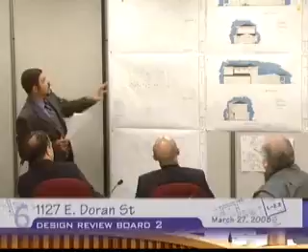The first front unit was built in 1923 with no garage, and the second unit in the back, which is smaller, was built in 1940 with a 1-car garage. They're not proposing to add any floor area to the second unit in the back, so they will not be asked to provide a second car garage for that. But they are being asked to add a 2-car garage for the front unit if they're going to add any floor area, and they are proposing a 2-car garage.

The existing house has a pitched roof. The main entry is accessed through the front porch. There are tapered columns supporting the front porch roof. The addition will have a pitched and hip roof with the same slope to match the existing, with exposed rafters. The rear unit will maintain its existing pedestrian and vehicular access. The applicant is also proposing that the common outdoor space for both units be located at the rear of the lot, over here.

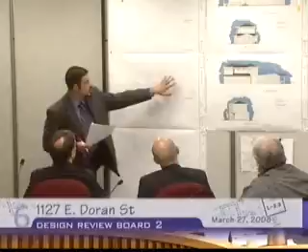Because this submittal is a preliminary submittal, we did not require them to have a landscape plan. However, I will get through the recommendation portion, and we do recommend that they add more plants and trees in the back of the property.

The proposed addition is located toward the rear of the existing front unit, and it is a 2-story addition. The existing 1-story house at the front will remain at its current configuration, and its appearance will be maintained from the street. The neighborhood is comprised of a variety of 1- and 2-story houses. In fact, the property right next door is 2.5-story, meaning a 2-story house, 2-story apartment building over a semi-subterranean garage. The project's massing is focused towards the middle of the lot, not the rear, but rear of the front house and middle of the lot, so it's not really having any major impact on the street level, I should say.

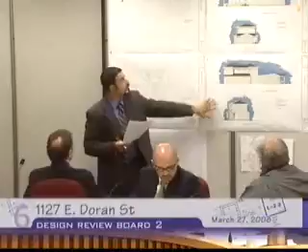The materials that are proposed to be used are clear double-insulated glass windows set in fiberglass. There will be wood sidings throughout. By the way, the elevation drawings that we have here are not up to date. They are proposing wood sidings throughout, and there will be no glass blocks—these have been taken out. You can see it on your handouts, but they're not here. Just to clarify that. And the roof will be asphalt shingle.

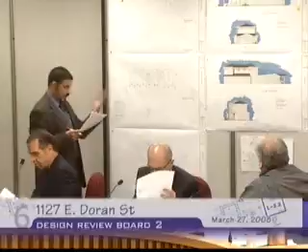Staff recommends approval to move to the final, based on the recommendations in the comments we have already made. The applicant has been able to create a proposal that fits well within the neighborhood and the site. The massing of the proposed project is focused towards the rear of the house and middle of the lot, which reduces its impact on the street level, and the overall appearance of the addition complements the front unit, the first one-story house, and fits well within the neighborhood as far as its massing goes. I am available for questions.

I do have some questions, but I will wait until the...

Okay, this is what I understand, and I went by but didn't walk into the property.

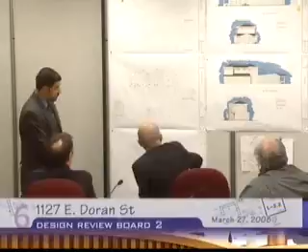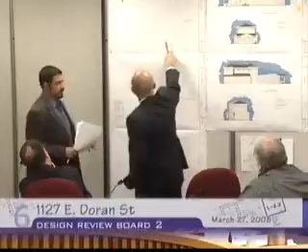What I understand is there's an existing one-story structure, and this other unit, considered the duplex, will be the front unit. This is the existing one-car garage, built for both units. But this other unit doesn't have a garage and never had one.

So now what we're going to do is maintain this, move it back, and have the two-car garage for the front unit. What we're looking at right now is just this - we have nothing on the back unit, as far as elevation drawings go.

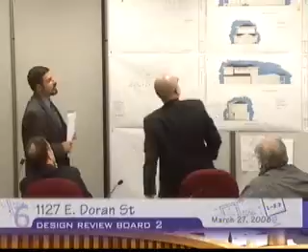They probably should be drawn to the back. I'm glad it's preliminary, so we can give them some direction of where to go with this.

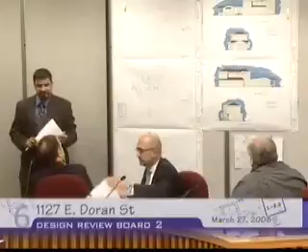Applicant is also in the audience if you have any questions. Any more questions? We good, aside from the applicant? Okay, I only have one card, which is the architect, Johannes Masei.

My name is Johannes Masei, and I'm the architect of this project. I'd like to thank the board members, chairperson, and Gevorg for the opportunity to speak. I think everything has been covered by Gevorg. We'd like to propose the two-story addition, with the style echoing the existing semi-craftsman or bungalow style of the front unit house, with wood siding, gable and hip roof on the new units, and exposed roof rafters that will complement the neighborhood.

I'd also like to add that on the east of the property we have three-story apartment buildings, and on the west a two-story similar building as we're proposing. Across the street there's a mix of one- and two-story buildings. Thank you, and I'm more than happy to incorporate input and feedback into our design, since this is just a preliminary design.

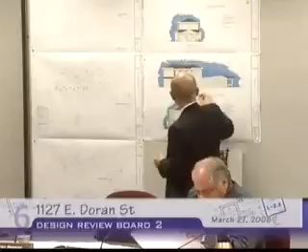First of all, I'd probably revisit the window selection, and rather than using vinyl, I'd go with something higher end. And if you are going to... It is fiberglass, I'm sorry for interrupting. If it is, that's what I was going to say - then I'd probably create a lot more substantial frame around it to create a better effect and more depth of the windows. But I'd re-look at these details of very contemporary features versus the old.

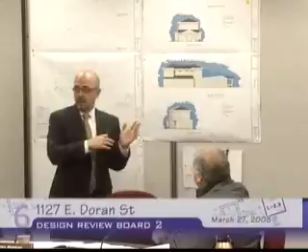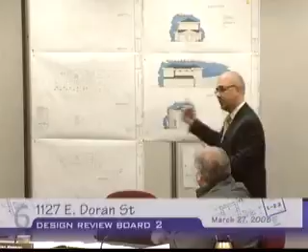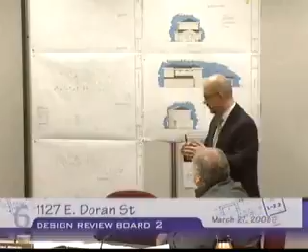You mentioned craftsman bungalow, and if you've seen me speak in past years, if you mention a style of architecture, I'm going to use that as my guideline and design your plans based on the architecture it's asking for. So looking at this as craftsman style, it's nowhere near there. If it's bungalow style, it's nowhere near there either. I'm just commenting, and you can absorb it, hopefully it'll help. If you're going toward those styles, I'd revisit this entire design and study the bungalow or craftsman style and see what makes a craftsman a craftsman - handcrafted elements of post and beam and woods, the rafters versus the posts and different things that come together, crafted. There's nothing here that shows us that.

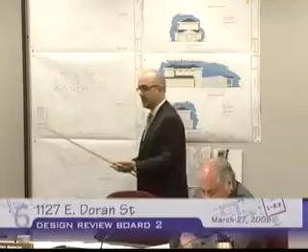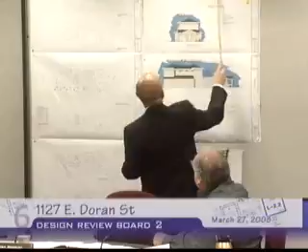So I'd highly recommend visiting this. But going back to my comment - these are just ideas - right now you're showing a storage area of about 62 square feet, and I'm not sure what that's all about. Another thought is that if you find another place for this, maybe an element here, an element there, and create a balcony over this, it can get carved out with a trellis element or something that works with the craftsman style. A balcony may appear here to create some transition points. The roof lines may play the same playful effects as the front - look at the design that way and take it to the next level.

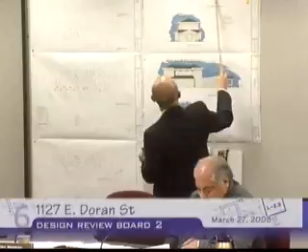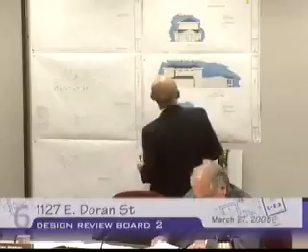To me it's a wasted opportunity, and it's not a craftsman nor a bungalow. If it comes back like this, I'd encourage my colleagues not to accept it. Look at the quality of the detailing - this isn't going to work. You're going to have a header there, with the post and beam - use that. It's an opportunity to detail that properly, create an overhang, maybe some exposed rafters like you mentioned, or a header and something there. Don't use Home Depot material for this - these garage doors - go a step beyond and use better quality doors and garage doors.

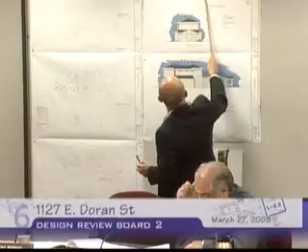And right now you're saying the entire facade is going to be covered with siding. Again, it's a good gesture, but use the opportunity to bring in different materials. Maybe the siding can occur here, and then in some areas you want to keep it as plaster. I don't know - just don't use one typical detail. You're going to have the joint between the existing and the new - how's that going to transition? So look at those things.

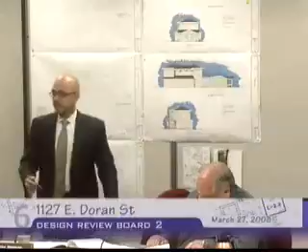And lastly, I'd recommend a very nice rendering. Renderings are always helpful, both for yourself and us, to be able to render it in an actual background and see how the massing fits within the two large elements there. Obviously, whatever you do is going to be proportioned because of the masses of buildings next to you. But we want to see the building not just be a squatty little addition in the back, yet we don't want it to overwhelm the front unit. So if you take that and look at this, I think we'll be okay with that.

Overall, I personally don't see a problem with the addition. I think it's fine. I have no problem with the second floor addition, or the addition to the front unit. So overall, I have no problem with the proposed project, but I have concerns about the way that the design has been implemented.

So there were a lot of comments, and just to wrap it up and clarify for the applicant as we continue to work with them, it seems that overall the board is amenable to the size and scale of the addition, but the applicant is encouraged to look at the massing and particularly the roof forms insofar as they relate to the existing house.